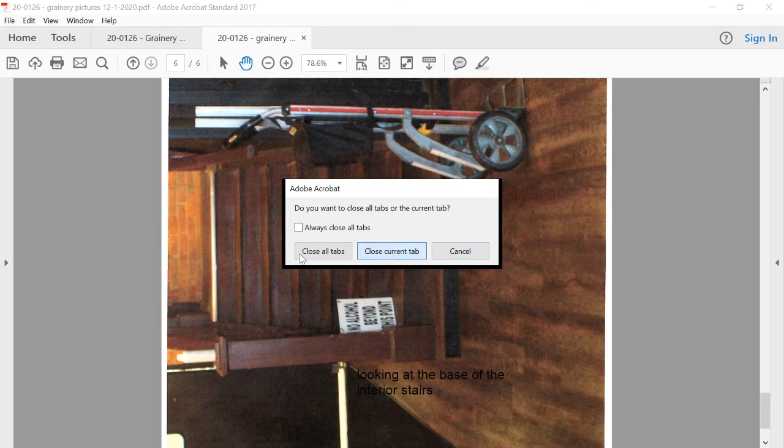I have a concern with the exterior stairs. Obviously, number one, not being covered, but it's all combustible material, and there's no protective measures like bollards or anything like that to make sure that somebody doesn't come down the alleyway and knock the stairs off the side of the building. So I would like to see some protective measures to make sure that those stairs aren't damaged and then left unrepaired for a period of time.

Brad? Yeah, I agree with Paul. You know, need a first floor plan. And with Neil, we need more information concerning the sprinkler system and fire tap, water tap.

If I could jump in, I just called the village administrator, Brian Adams. Please. He did confirm that the village did approve the waive of the fee for the fire system taps from the village. And he said that it was passed at the meeting a couple weeks ago. That should go into effect within the next couple weeks. So that is confirmed. They did waive the tap fees. Thank you. Well, I think if nothing else, we still need the first floor plans.

Well, any other thoughts? Yeah, I could prepare all that stuff and submit it to Mr. Hale. And I would prefer probably not to set a date for a hearing till I got it to Mr. Hale and he could review it. And then I could let Susan know and we could get put back on a docket if that works for the board. That would be a scenario that could work. What do the members of the board think? I'm fine with that. Yeah, I'm fine with that.

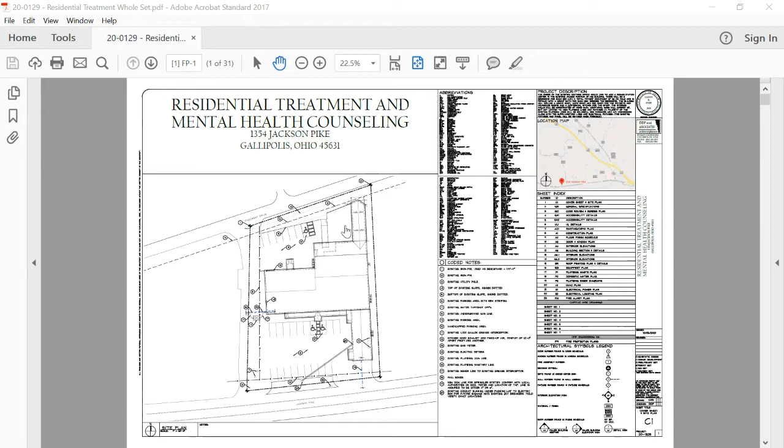May I interject some information? Yes, sure, go ahead. In response to your question, there would be a 0 fire rating since we're more than 10 feet away from the property line. Yes, thank you. So in terms of access, a couple of things. The lady next door is an RN. She's retired. A really nice lady, great neighbor. She is not willing to grant an easement or sell the property. The property she values at over $200,000.

It seems from what I've seen, and I'm no fire official, but when there's a major fire, it seems like eminent domain sort of becomes an option for people to gain access to a burning building. But she is definitely, without question, not giving her consent. And I do understand that she could sell the property. Maybe I could ask her to sign a document that if she sells the property, it is with the stipulation that there is fire truck access in the event of a fire.

But if you look at the diagram of the building, Jackson Pike's on the bottom, and in the back and on top of the diagram, you see there is a big parking lot. You see the wheelchair access sign with the ramp. If you look below that ramp, you see there are like 4 stairs going on to a deck. So actually a fire truck can pull right into the back parking lot and run a line right into the building. So the fact that the right wall on the diagram is 136 feet long, a fire truck in the back of the parking lot can access the building right there in that corner. There's doors.

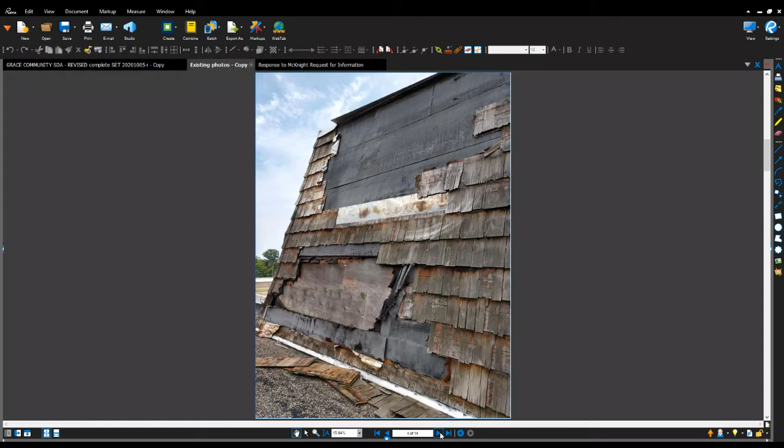It's in complete disrepair. It's been sitting empty since 2002. And so as you can imagine, HVAC units were stripped a long time ago. Electrical wiring has long been gone from the building. And it's in pretty rough shape. But again, the church is committed to this site and are really wanting to invest in the community in this

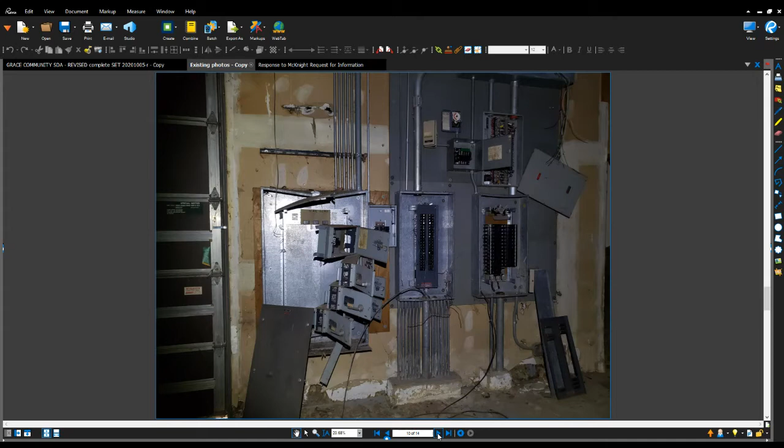location. So the issue is that obviously the building's way too big for use group A3, construction type 2B, 1-story sprinkled. We're limited to a max of 38,000 square feet per table 506.2. So there were really only 3 options to make this work. One was to go for unlimited area per section 507 and 507.6. And that's been our plan from the beginning. We had discussed that being our main plan from the beginning.

Of course, there are several requirements. It can only be 1-story and sprinkled, which it already is and will be. There cannot be a stage, but only a platform, and we certainly will comply with that. The big issue is there must be 60 feet clear all the way around the building. And so, again, we can achieve the 60 feet on 3 sides, but on that northeast side, we would have to demolish approximately 60 feet of the building and then build a new wall, new foundation, modify structure, handle shear in a new way. I mean, there's just a lot involved in that.

And the additional cost for that, we'll get into cost here in a few minutes, but the additional cost to do the demolition is just a little over $500,000, and that includes the new structure, new wall, all along that northeast side. So that's the whole big first option of how to make this project work.

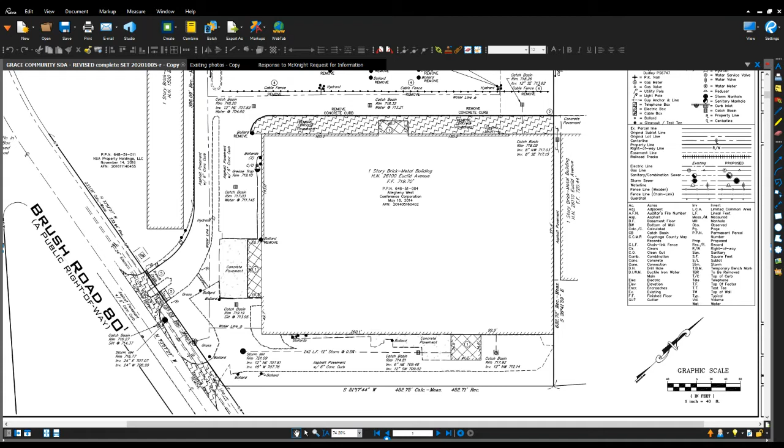Of course, the third option would be to demolish 2/3 of the entire building until all that was left was under the 38,000 square foot limit. And we never really considered that as an option. So the building has to be sprinkled in any case. And so I'm going to switch to a floor plan here and just show you a little more of the entire building.

Hey, Bill, we don't have that on the screen. Is there a way we can see that on the screen? This is Martini Construction. I don't know if we got bumped off the screen. We hear you. All right, is everybody else able to see? The board is. Yeah, we see the site plan up. All right, Martini team. Everybody that is signed in as a presenter can see immediately on their screen. If you are watching as just a viewing participant on the web and participating via phone, anything on the web is going to be a 10 to 15 second delay at best. All right. There we go. Okay, go ahead. I'm sorry.

All right, on the screen now, you should have a floor plan of the entire facility. And again, this is without the 60 feet on the right side demolished. And so basically we got to the point that the total project is 2.7, almost 2.8 million without the demolition, which is another $500,000. And the $500,000 really puts the project out of range for the church.

And so this is when the Martini Construction team and the owner were able to get a meeting with city officials on September 3rd of this year. They met with Steve Vogel, members from the mayor's office, the building department, fire department, to figure out how to help this project move forward. And coming out of that meeting, there was consensus on a few things.

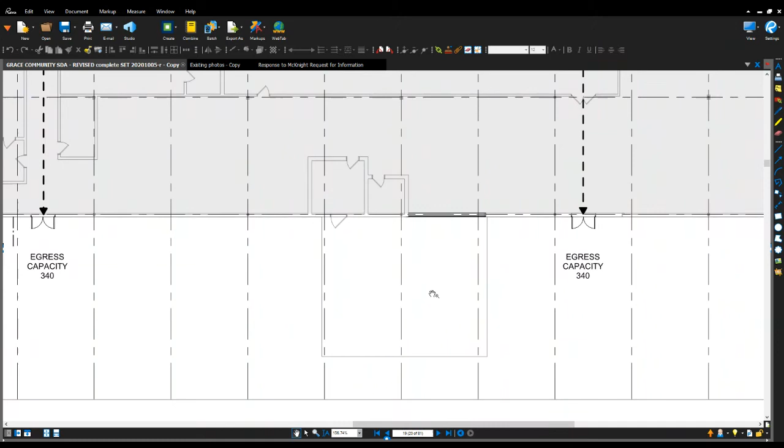And so we're pretty confident that it's certainly easily 2-hour fire rated, being a 12-inch concrete block wall. But the bottom line, and Steve Vogel can address this as well, they said that there was a possibility of drilling holes to check it out, but maybe didn't even feel that was necessary. So that is what we are asking, is permission to go above the limit of area if we do these other things above and beyond.

There is no fire barrier required at all between A3 and S2, but upgrading it to a 2-hour fire barrier certainly would be above. And then again, making sure that there's at least 20 feet around 3 sides of the building for the fire department was a big part of that as well. I think that is everything that I'll mention at this point. Certainly happy to answer any questions that anybody might have.

Any questions of Mr. Tipkin by members of the board? Yeah, I understand the rest of the building is still planned to be S2 and currently unoccupied at this time. Does the church have any future plans of what they want to do with that space? Are they anticipating leasing it out? If so, what are the types of uses that you plan to see in there?

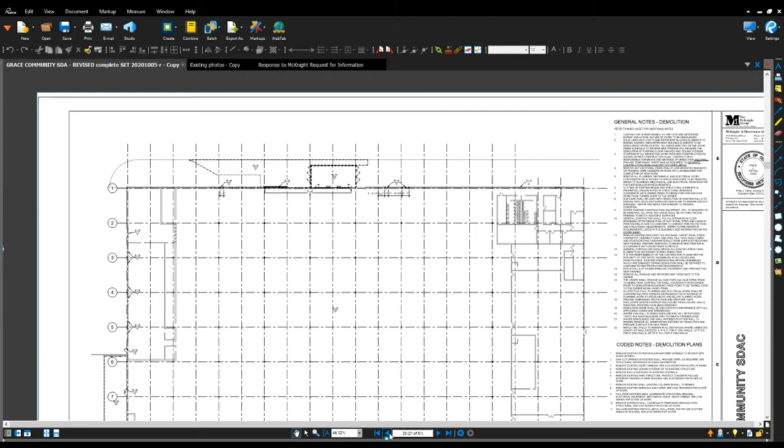Yes, we do. And let me go back. This is a blow up of the remodel area, and the dashed lines represent egress paths. And so you can see even from the shell space, we are showing doors coming back into the building with exit signs so that there would be egress from that space. And then this is the overall larger plan. And again, you can see just how many exterior doors there are throughout that entire space. And we've shown the egress paths, and there would be exit lights. And so, yeah, absolutely egress from that space.

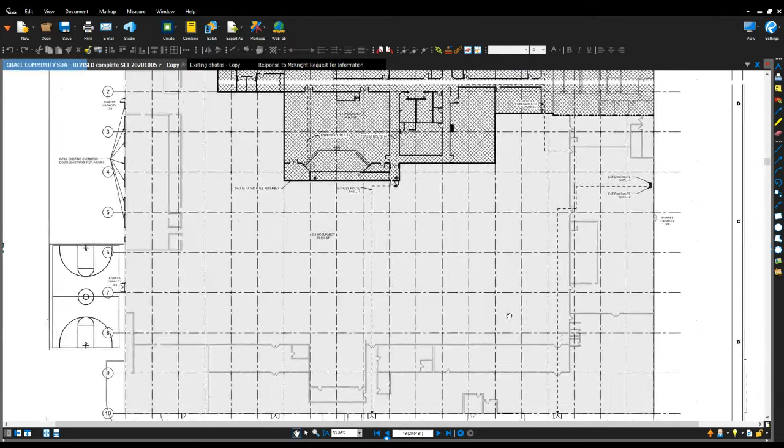So that raises the question of how do you make sure that young kids or whatever don't go out into that space to do nefarious things, and if there is an emergency, how they traverse safely across 100,000 square foot of space. I realize you say there's exit signs and exit lighting, but is the shell space lit? How do we make sure they get to those exits? Because there doesn't appear to be any defined means of travel.

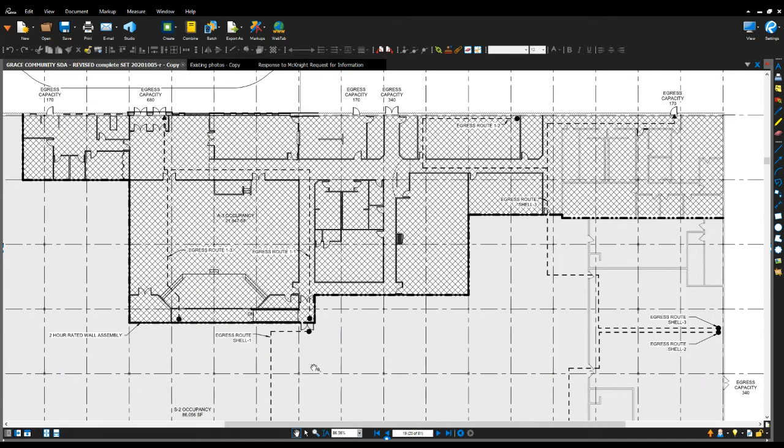Yeah, this may be a good question for Jason Cottrell to help answer here from my office. There certainly could be, I don't remember off the top of my head if we have lights that are designated as night lights throughout the space. We should. Certainly that's a code requirement. The doors specifically in the 2-hour fire barrier between the remodel and the S2 could definitely be locked, could have panic hardware, one direction only from the shell space back into the remodeled space into corridors. And so that would be, I think, a very simple thing to do and could prevent anybody without a key from getting back into the S2 area at all.

Yeah, and Philip, this is Jason Cottrell. There is no need for any of the church space occupants to egress through shell space. It's just the opposite. We did provide the egress route, that if someone were in the shell space, they can egress through the church space, but there's no one in the church space who we are pathing through the shell space to get out.

Hey fellas, this is JP Martini, and we're listening. Those will be alarmed anyways, I'm sure, going into that other space. I think that's one of the safety issues that we would bring up, that those doors that were going through that area would be alarmed.

Well, the doors in the wall between the church A3 space and the S2 do not have to open into the S2 area at all. They could be locked in that direction. Beautiful. Coming from the S2 back into the A3 could have panic hardware and exit signs, and be alarmed even, if we want to make sure that if any of those are opened, we know. But yeah, as Jason pointed out, we've designed it in a way that there are no occupants exiting through the shell space or the S2 area. Good. Even better.

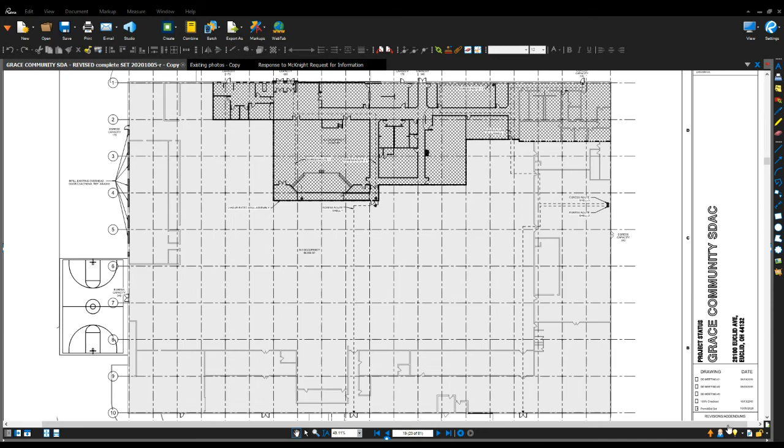Okay, Mr. Chair. I'm going to throw these up on the screen here, and then I will read through them. Okay, Nick, we're back on record. Back on record, yep. Okay, I have put them up on the screen. If you are participating by phone, it's going to be a few seconds before it shows up on your screen.

This variance is conditioned on the following. Number one, a fire suppression system shall be installed throughout the entire structure in both the A3 and S2 use group areas based on OBC section 903.3.1.1 and NFPA 13. Number two, means of egress illumination shall be provided throughout the S2 area per OBC section 1008. Exit signage shall be provided throughout the S2 area per OBC section 1013. Additional exit access identification shall be provided to the satisfaction of the fire official.

Number three, a 2-hour rated fire barrier shall be provided between the A3 and S2 use group areas. Openings into the fire barriers shall be protected according to OBC section 716. Penetrations through the fire barriers shall be protected according to OBC section 714. Number four, the S2 area shall remain unoccupied except for limited temporary storage use for the church use with permission of the fire official.

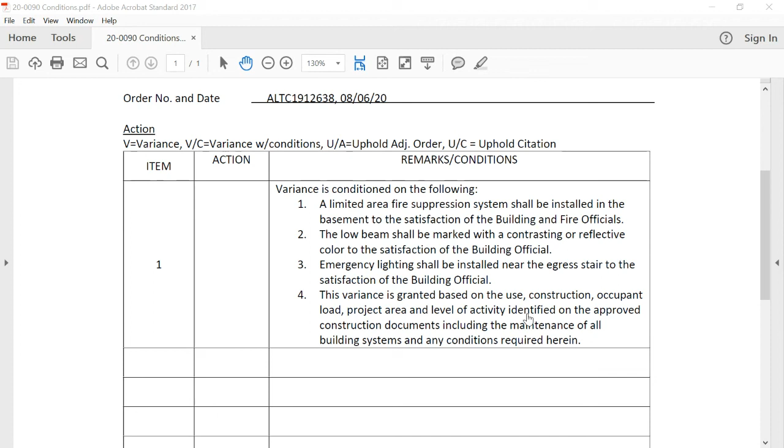I'd entertain a motion. Yes, Mr. Chair, for Board of Building Appeals case number 20-0090. The appellant is Pedro Ascadome for the premises 1408 Oakland Park Avenue, in Columbus, Ohio. The appellee is Amit Ghosh, building official for the City of Columbus Building Department, and adjudication order number ALTC 1912638. I move that the variance be granted subject to the conditions previously read in the record and noting no objection of the building and fire officials.

Okay, that motion's been made. Is there a second? Second, Mr. Chair, Chip Welch. All those in favor say aye. Aye. Any opposed? Okay, the variance is granted on those conditions. Anything else to come before the board on this case? Hearing none, we'll stand adjourned on that case. Thank you very much, Young and Amit and Chief Sanders. Enjoy your weekend. That concludes our active docket.

Case number, I got a phone ring behind me. Case number 20-0118, which was a Mideast Ohio adjudication matter, has been continued, as was an elevator division case this morning. Someone may need to mute if they're on the phone. Case number 20-0112 has been continued to December 14th. So that would conclude our docket today, subject to approving our time and effort preparing and participating today. Is there a motion to approve compensation of the board members? So moved, Mr. Chair. Motion's been made. Is there a second? Second. All those in favor say aye. Aye. Any opposed? We've approved the minutes for November 16th and 17th already, established dates for January, and resolved that we're compensated for our efforts today. Is there anything else to come in front of the board?